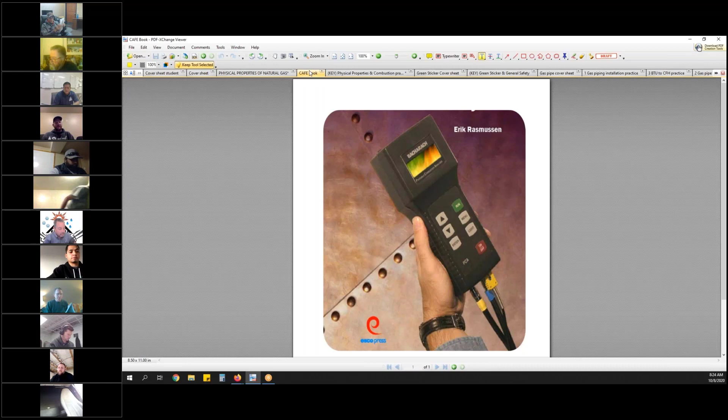All right, so our next one was chapter 2, page 24, which is the chapter 2 review questions. Kurt Daly, did you answer the questions? I did, whether I got it right or wrong. Okay, well why don't you go ahead then and take the chapter 2 review questions.

Start at number 1, you don't have to read the question, just go slow so everyone can keep up, but just tell us what you got and where you found it, and if you got it right or wrong I'll let you know.

Okay, I got true for 1. Okay, and where did you find it? It's on page 11, is the answer to that question. What'd you get for number 2? I got true, it's on page 11.

I want you to go to all those pages and find them and highlight those answers, because again this is an open book exam when you go to take it, and the quicker you can find the information, the easier it's going to be. All right, keep going.

What'd you get for 3? False, false. Okay, where did you find that at? It's on page 14, page 17, and page 22.

What'd you get for number 4? False - that is incorrect, the correct answer is true, and that is found on page 14 and page 16 of the book. Okay, what'd you get for number 5?

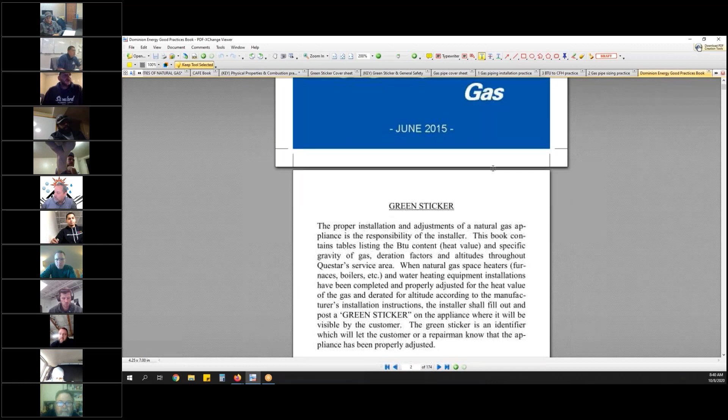Okay, absolutely right. If you have an old book, it's on page 7. If you have a new book, which is the blue colored book, let me pull it up so you can see it. I sent a copy of this to all of you, so it's on page 7 and also on page 11. I would highlight that because you can take it into the test with you.

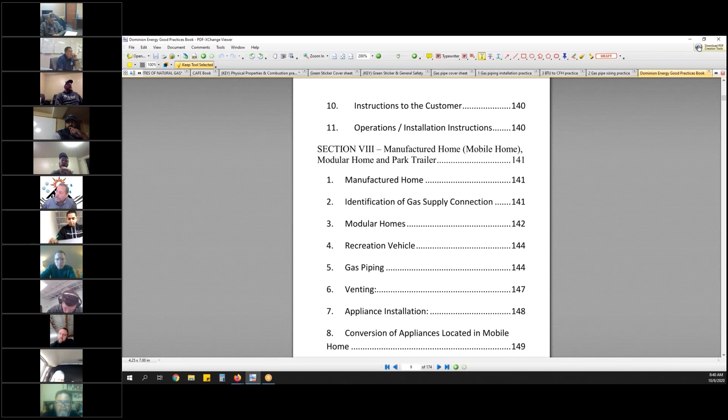So we're going to go back over here to the green sticker cover sheet. We'll continue with you, Carlos, for a few more questions. Number 2, what did you get on that one? It is the responsibility of the installer, and it is on the front page, page 1.

It's like the top, the first thing out of the book. Okay, the responsibility of the installer. So it's right up there in that information.

All right, very good. What'd you get for number 3, Carlos? Refuse gas supply or gas service, and that is on page 11. Okay, page 11 of the new one. If you have an old one, it's on page 7. I sent every one of you a copy of this new one, but if you're working off an old one, the information's on page 7.

Okay, we'll let someone else take over. Let's see, it was... Blake, or no, it was Alan who was raising two hands. Alan, take over on number 4. What did you get? Number 4 is natural gas certification and your identification. And where did you find that in the book? I didn't write that down.

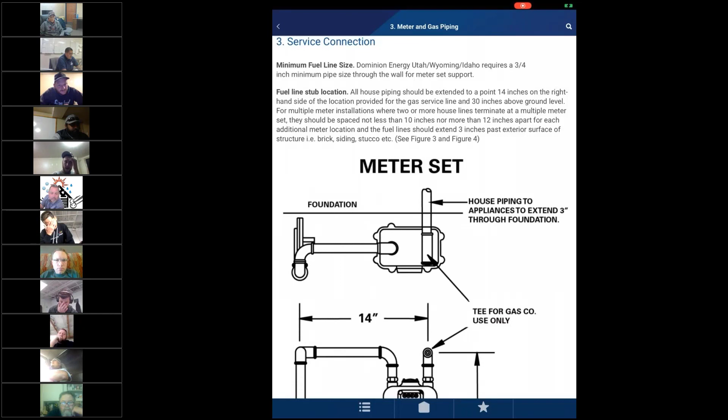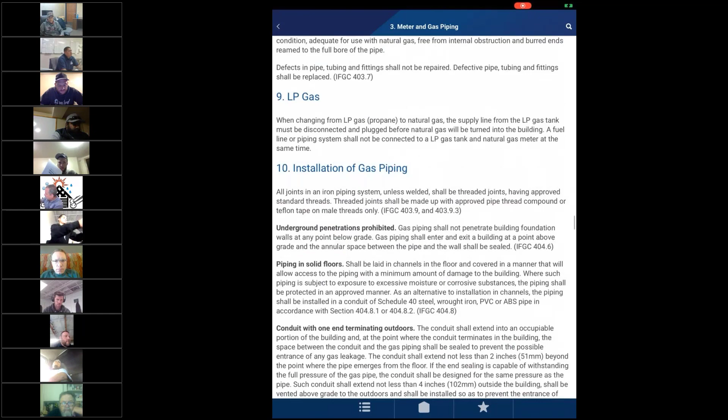Okay, this is the Good Practices app, guys. It's got all kinds of cool stuff in it, but meter and gas piping here. Can you guys see this screen that I'm showing you first of all? Yes. Okay, so you can see the app. So like section 3 that I just clicked on talks all about meters and gas piping and everything. It's basically the book on an app, so you can use it on your phone. It's a really good app, okay?

And what's the app called? It's called the Dominion Energy Good Practices app. You just go to the App Store, and they have it for Android and iPhone and all of that. And the other cool thing about the app is it has some calculators in it. So let's see. Back. So it has calculators, so it will do calculations for you, like we're going to learn how to size gas line. Well, you can use the app, and it makes it really easy to help you size gas line.

I'm going to teach you how to do it the old-fashioned way. The problem when you take the exam is they won't let you take your phone or your iPad and use the app on the exam, which I think is a little bit shitty of them because they don't produce the books anymore. They went to the app, but they won't let you use the app while taking the exam. So that's why you're going to learn how to do it the old-fashioned way.

Okay, everyone can see the screen now with the PDFs on it? Yes, sir. All right, good deal. Okay, so your homework assignment is you're going to complete this. And again, you'll have 2 weeks because I'm taking next Thursday off. And then you're also going to learn how to size gas pipe.

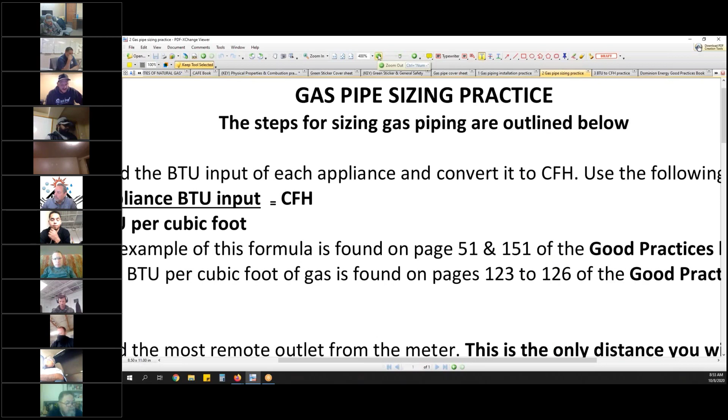So the first step to sizing a gas line system is you find the BTU input of each appliance. Let me make this bigger so that you can all see it good. Whoops, not that big, okay. Can everyone see that okay? Or is that too big? There we go. Okay, everyone can see that okay? Yeah. Okay, good. All right, gas pipe sizing.

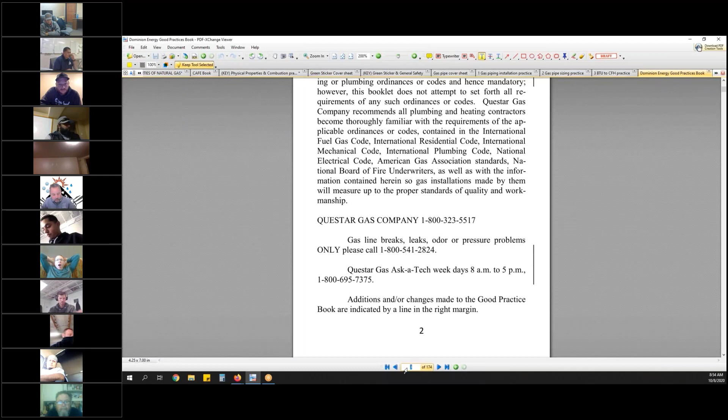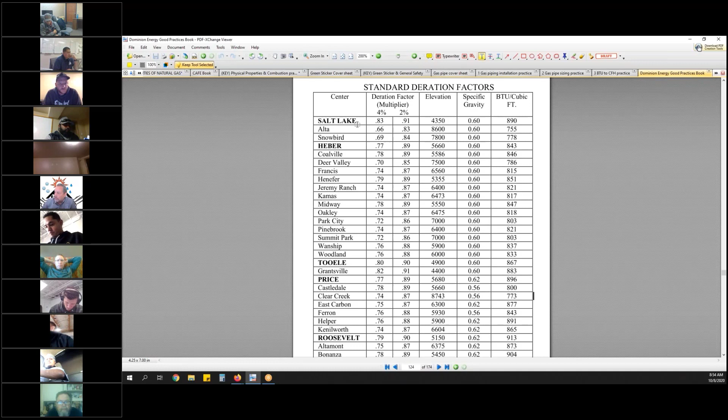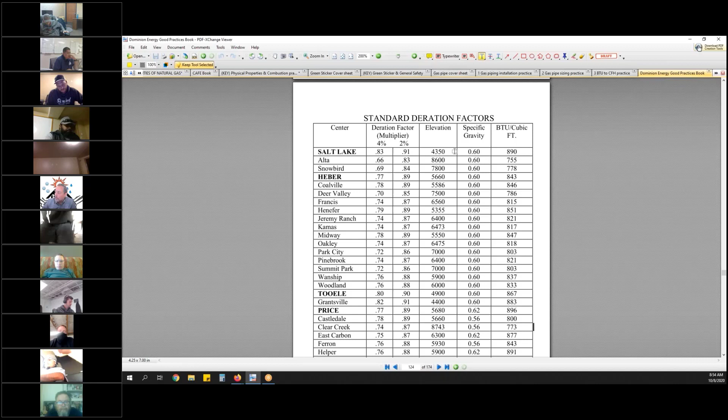When we're sizing gas pipe, the first step is you have to convert BTUs to CFH, cubic feet an hour. And you use the following formula: the appliance input rating divided by the BTUs per cubic foot, okay? So if you go to page 123 and 126 of the Good Practices book, it gives you specific gravity and BTU content and deration multipliers and all kinds of information for everywhere in Utah, okay? So if you need to know what the BTU content is of something or specific gravity of something or the elevation or a deration multiplier, these are the pages where you would find it, okay?

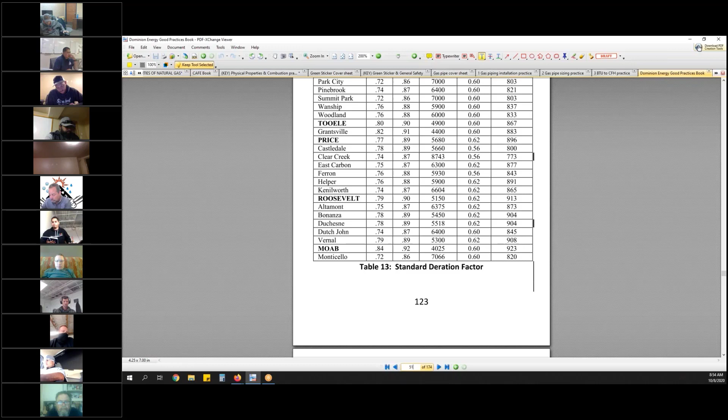And then also, let's see, on page 51, okay, it talks about sizing gas piping, and we always use the longest run sizing method. That's what we're going to learn how to do, and that's the only method you want to do is the longest run sizing method, okay? And it takes you through examples, shows you everything that I'm going to show you up here, okay? So first thing we need to do is find the BTU input of each appliance and convert it to cubic feet using the following formula, okay? Then we find the most remote outlet from the meter. This is the only distance that you will use when sizing gas line.

You'll use tables on 55 and 56 of the Good Practices book. You select your most remote distance. Note, there's a page for a 4-ounce system, which is most every standard residential system. I'll bet every one of you that has natural gas has a 4-ounce system on your house.

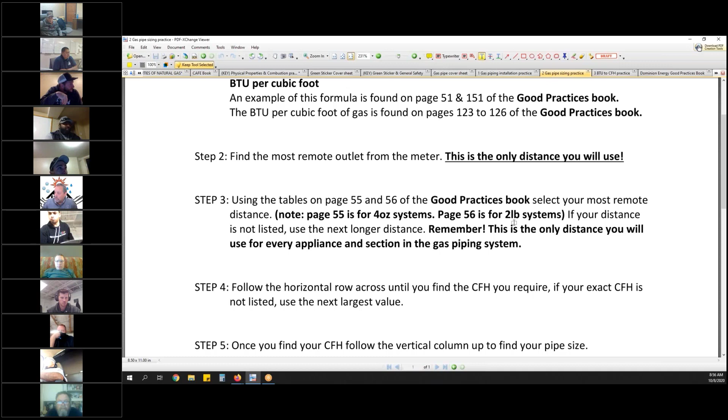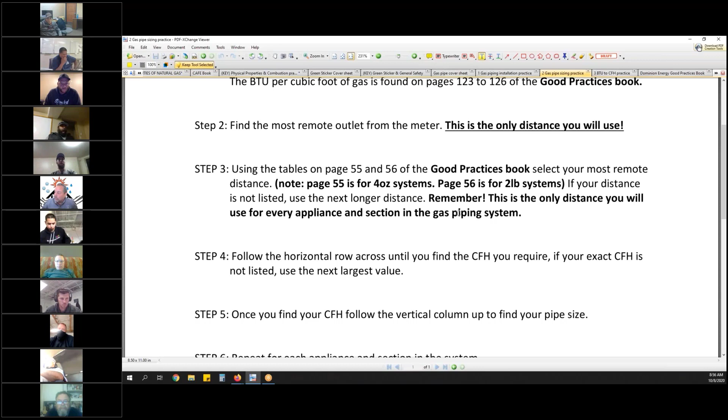There are also what they call high pressure 2-pound systems. I have a 2-pound system on my house because I used a manifold system, and we'll talk about that later. But there are 2 different pressures you need to be aware of, because if you're sizing a system with 4 ounces of pressure, but you're over here on the 2-pound system, you're going to get wrong answers. If your distance is not listed, always use the next longer distance. Remember, this is the only distance you will use for every appliance section in the gas piping system. The mistake I see guys make is they start trying to size individual branches, but you only use one number, the longest run in the system.

Once you get down, they've got this chart in here, and I've just got a snippet of it, but I'll show you the whole chart in the book. Here's an example: let's assume we need 300 CFH, and the most remote distance is 30 feet. First, find the 30-foot length. So I come down the chart to 30 feet, and I need 300 CFH, so I go across. 95 won't cut it, right? 199, 374 — 300's not listed, so always go to the next larger one. Everyone with me so far?

Once you find the CFH you need, you simply go up to your pipe size. So in this case, I need 300 CFH, and I've got to go 30 feet — I'm going to need a 1-inch pipe to get there. You guys with me so far?

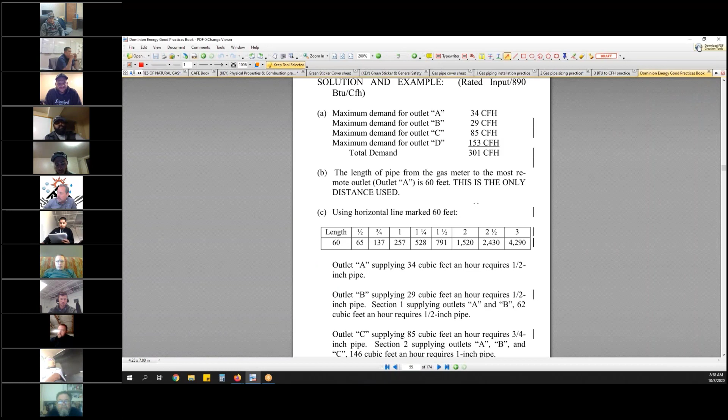We're gonna do an example of that. But that's how you size a gas line, and it's over here in the book. Here's that chart I was just showing you with all the lengths. These numbers are all BTUs converted to CFH, and once you find the number you need, you go up and get your pipe size. So let's go back over here. Makes sense? Everyone good with that?

Any questions about that before we actually pull up a gas line schematic and I size one with you? I've got like 8 more that I'm gonna have you guys work on as part of your homework. But is there any questions to this point? No, I'm not seeing any hands raised or anyone talking. Okay, so I'm assuming you're all on board with me.

Jordan, you're confused? What are you confused about? He's always confused, don't worry about him.

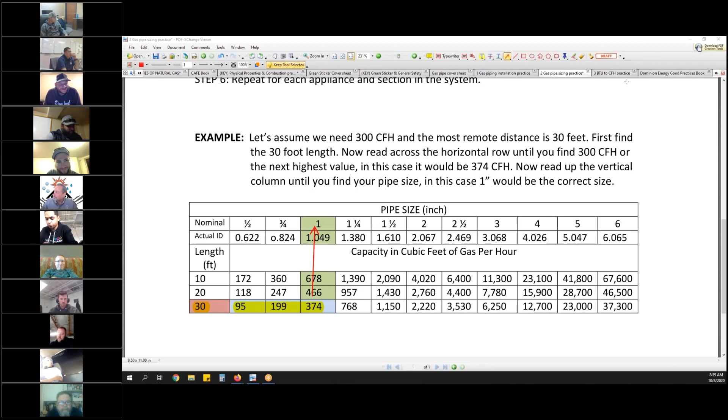Okay, so the first step, step number 1, is convert BTU to CFH. That is the first step. So I've given you a handout where, guess what you got to do — you're going to take every one of these BTU inputs and convert them to CFH. So that is your homework.

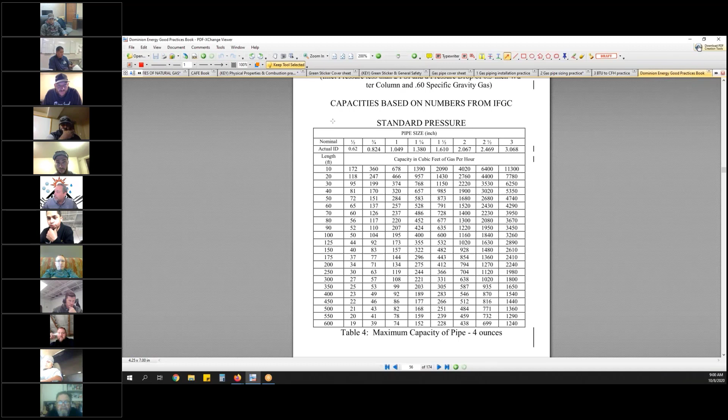Remember, you're going to have this little practice exam with 35 questions. The only way you're going to be able to answer those is to use the book or the app. So that's homework number 1. Homework number 2 is convert all these BTUs to CFH, because that is step number 1, the first thing you got to do. And that's where I see guys make their mistake, because they forget they got to convert BTU to CFH, or cubic foot per hour. And there's all the information you need to do it.

And again, this is an open book exam. Okay, so now let me go see where I put it. I'm going to pull up, give me one second, get rid of some stuff here. I'm going to pull up a gas line schematic — I sent you guys a bunch of attachments, and a bunch of them were gas line schematics.

While I'm pulling this up, did everybody get their attachments and their gas line schematics? Okay, I see everyone shaking their head yes. If anyone didn't, what was that?

Okay, all right. So the first one we're going to do is this one.

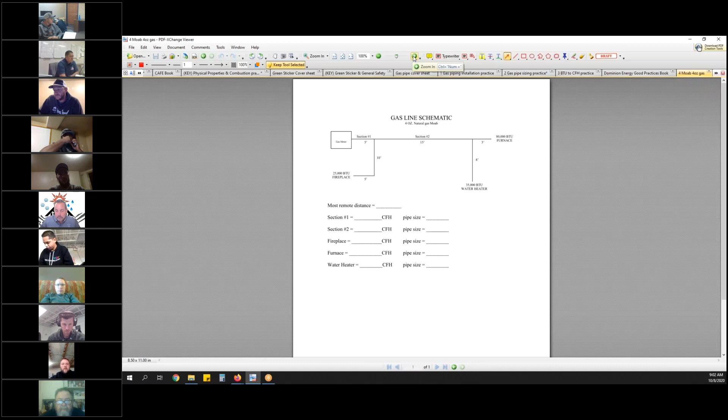Everyone see that schematic on my screen? Do I need to make it bigger? You should all have a copy of it. Let me find it though. Okay, I emailed you all a copy of it. I'll make it a little bit bigger. I'm going to do this one with you, and then the rest of them that I sent to you, that's going to be your homework.

Does everyone have this schematic in front of them? If you don't, you need to let me know. Who does not have this? Looks like we're all good.

When you take the actual exam, they're going to show you schematics like this, and they're going to ask you to size it. It's going to look exactly like this. First thing you need to know is what pressure you're working with and where you're doing it. So we are working with a 4-ounce system, natural gas in Moab. That's important information we need to know.

So we're going to start off with - Carlos, can you tell us the answer to this question? What is the most remote distance on this gas line schematic? 28? What's that? 28, okay.

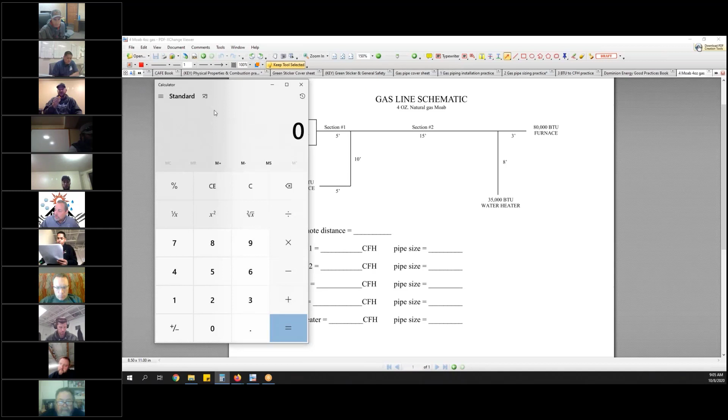Okay, so if I add up all those BTUs - let me move this over here - I've got 25,000 BTU fireplace, plus a 35,000 BTU water heater, plus an 80,000 BTU furnace. So section 1 has got to be able to service 140,000 BTUs, but I've got to convert that to CFH, correct? What is the formula? How do I do that?

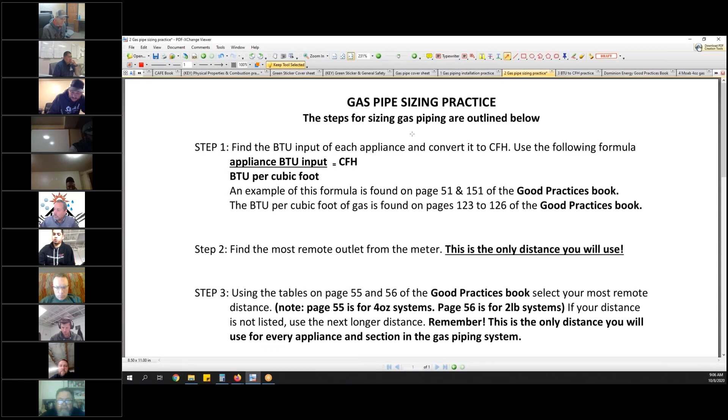So we'll go back over here. The formula can be found on page 51, but it's the appliance BTU input divided by BTUs per cubic foot. Okay, so I'm going to go back over to my schematic.

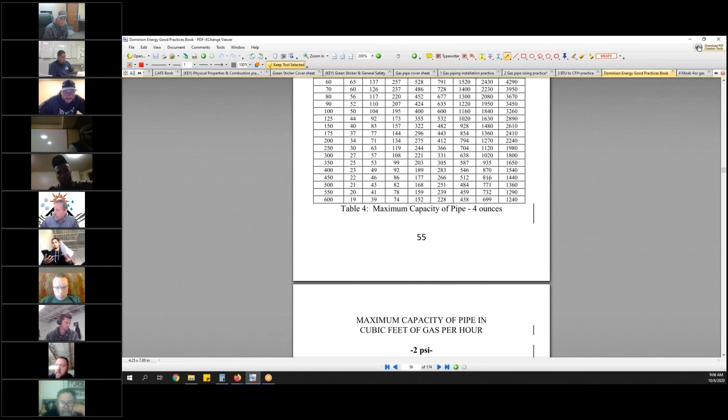Okay, so I know I've got the 140,000 BTUs that we came up with, but I've got to convert that to CFH. Now I'm in Moab, so I'm going to go over to the good practices book, and I've got to find the BTU content in Moab.

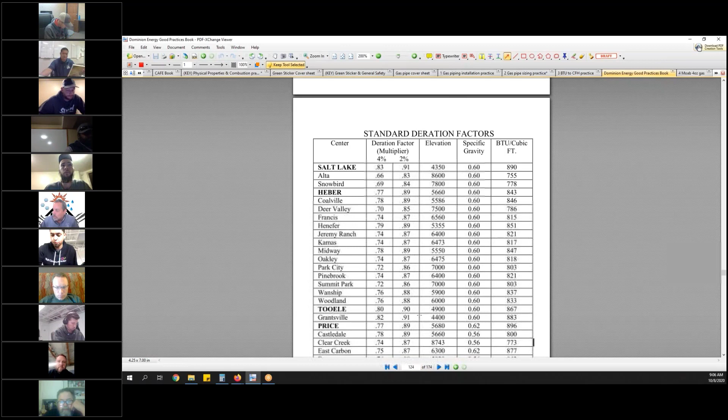Okay, so I go in here and I got to find Moab, right? Hey, there's Moab right there. What is the BTU content for Moab? 923, all right, very good.

So according to our book, we take our appliance BTU input divided by the BTU input per cubic foot. Because we're working in Moab, we know we need to divide our 140,000 BTUs by 923, correct? Everyone with me so far?

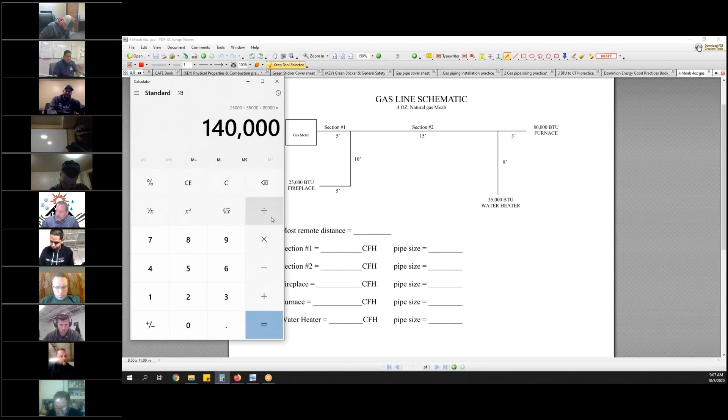Go back to our schematic. So 140,000 total BTUs, but we got to convert it to CFH. I divide that by, again, 923.

Divided by 923 equals 151.67 CFH. Okay, so that first branch has to be able to carry 106 or 151.67 CFH. Is everyone with me so far?

If anyone is confused or doesn't understand, raise your hand. The table's on your app. Yep, if you have the app, this thing is super easy, it'll do it for you on the app. Unfortunately, you cannot take the app into the test with you.

So you've got to know how to do it old school. I just want to know where the tables are so I can look up your thing, 'cause I don't have an old book. Oh, so if you go into the app, right at the beginning, down at the bottom, there's kind of 4 little elongated dots. Click on that, and it should have a listing that says tables. Find it? Yep, okay, so that will have all these tables in it.

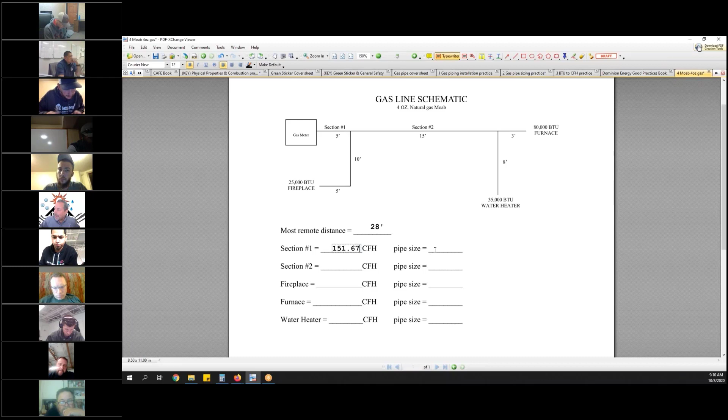So to find the pipe size for that, I go over to my good practices book, or if you have the app, it'll do it for you. Okay, go to my good practices app, and I use 28 feet.

That's all I care. Oh, but wait, 28 feet isn't listed, right? So what number do I use if my number's not listed? The number above, the highest. Go up to the next highest number.

Okay, so I'm going to go to 30 feet, and I'm going to go across until I find 151 CFH. Well, that won't cut it, that's only 95. And 150 isn't listed, so I go to the next highest one, 199. And then I simply go up this chart, and it tells me that I need 3/4 inch pipe.

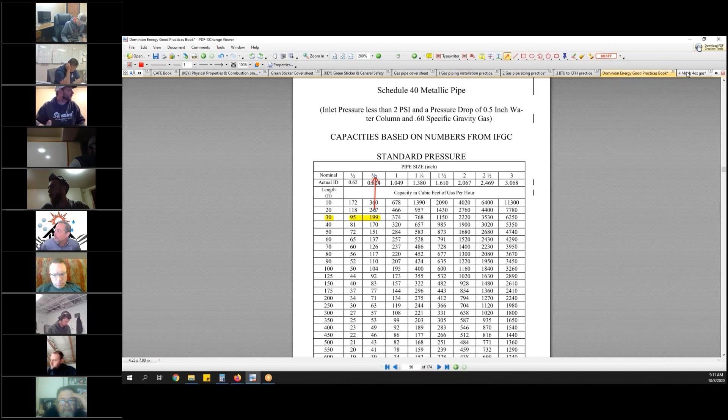So I come back over here, and I plug in pipe size, 3/4 inch. Whoops, that's 3/4 feet, 3/4 inch. Okay, everyone with me so far? Any questions? Anyone totally confused or freaking out?

Okay, I'm going to let one of you size section 2 for us. So let's see, Robbie, go ahead and turn yourself on so you can talk to us and the rest of the group. Yeah, you would pick on me, wouldn't you?

Of course. You guys all know Robbie is an insulator. You've never worked on furnaces, right, Robbie? No, this is why he's kind of scaring the crap out of me here. Okay, don't worry, you're going to get through this. 'Cause if you just do what I'm showing you, you will pass this test. I promise you.

Okay, I want you to size section number 2 for us. So section number 2 is this section right here. Okay, so let's start with, we already know our most remote distance. What appliances is section number 2 servicing for us, Robbie? Looks like going toward the furnace.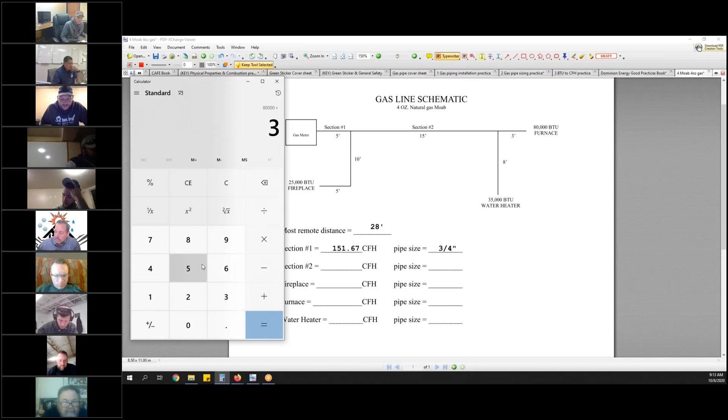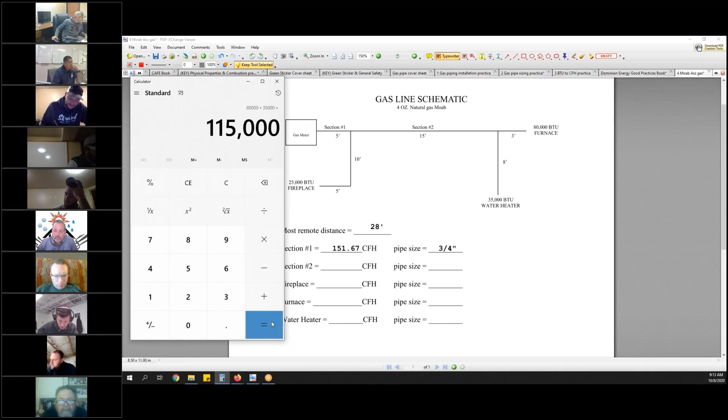80,000 plus 35,000. Whoops. Dork. Is 115,000. Now what do I got to do next, Robbie?

So we got to convert that to CFH. Okay, and what is the number I'm going to use because I'm in Moab? Help me here. Okay, so I'm going to go over to my good practices book or the app.

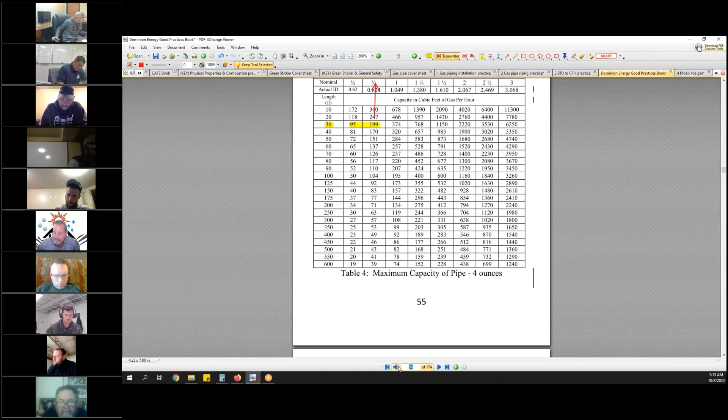Which one are you using, the book or the app? I'm just watching the screen here, I don't have either. Oh, okay, well I emailed you this book in the first email I sent out.

Okay, so right here, Moab. So, well, 923, right? 923. Okay, that's the BTUs per cubic foot. Yeah, okay, there you go. Okay, so now let's go back to the schematic and our calculator.

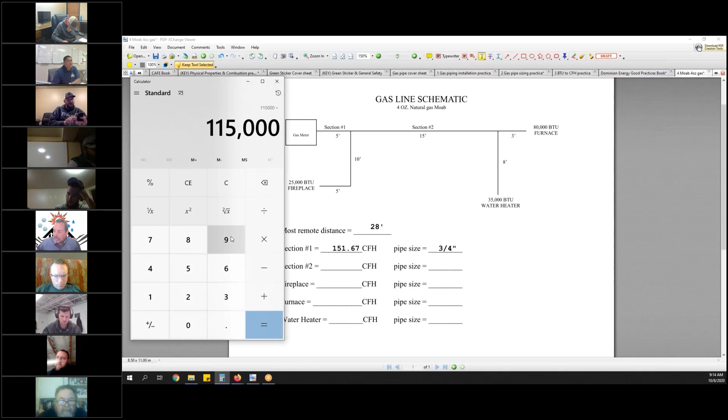Okay, so 115 divided by 923. 124.59. Okay, absolutely. So I'm going to go ahead and write that in here in this box, 124.59. Okay, now Robbie, what size pipe do I need for that branch or that section?

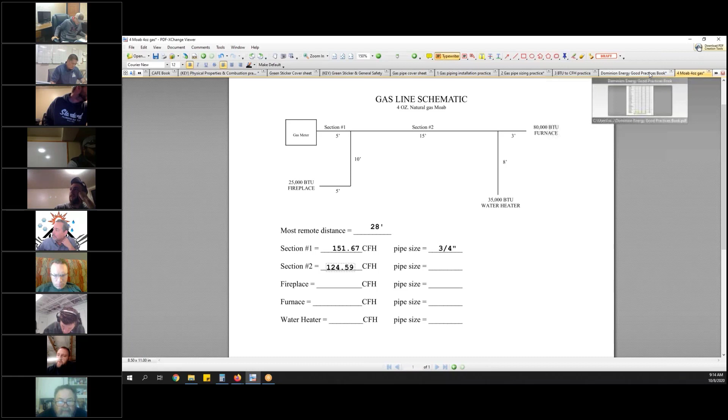How am I going to figure that out? Got to go back to the thing, got to go back to this damn book, right? Or the app. Yeah, the app will do all this for you, but you can't take the app into the test. Yeah, that's what you said. Yeah, all right, let me get rid of these ones.

All right, so again, we only work with one distance, 28 feet, okay? So we're staying on that same one. We go across until we find something that will give us... okay, half-inch won't do it, right? So it looks like we got to go to 3/4. We read up the line again. 3/4. Come back over here and put our pipe size in. 3/4.

Okay, Robbie, who's never worked on a furnace but is the best damn insulator in the program, you just sized your first gas line. How hard is it? Not too bad. As long as you follow the instructions and follow the book, it's pretty easy, right?

Yep, follow the book. Follow the book, read the instructions. That's my mantra, right. Read the instructions, follow the book. There you go. Perfect. Mr. Brandon Nez, can you hear me okay? Are you going to start crying?

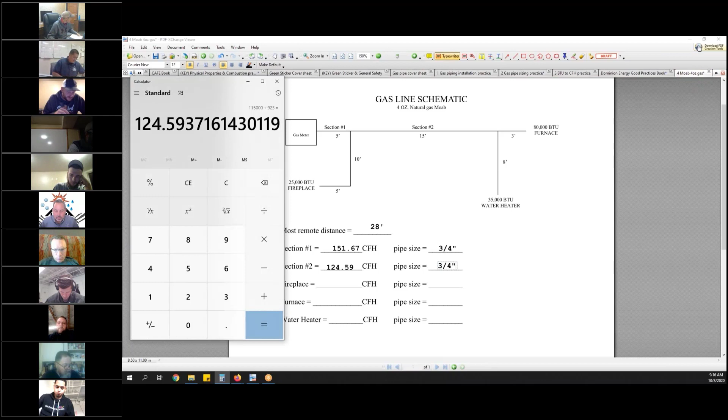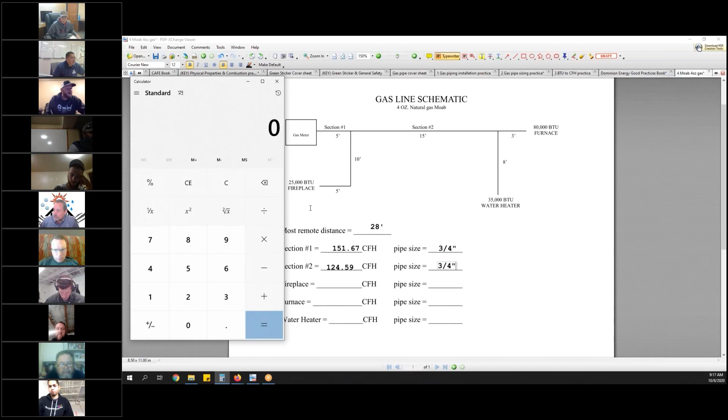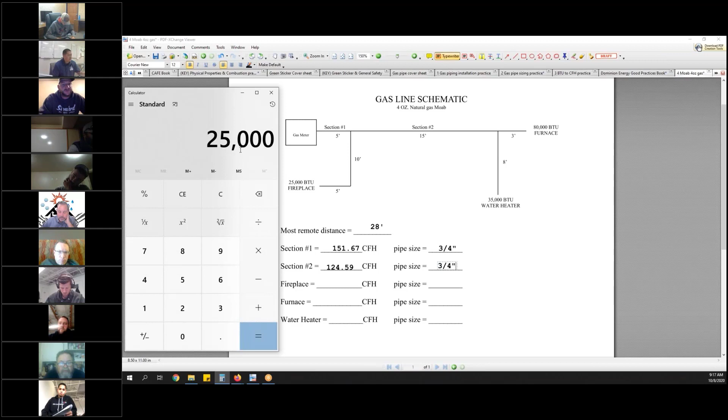Okay, so we take 25,000 because that's what our fireplace is. Okay, let me move my calculator out of the way a little bit. There we go. Okay, because now they're asking you this line feeding the fireplace has got to be what size? So it's 25,000. So how do I convert that to CFH, Brandon? Go to the chart. Okay, so I go to the chart. It's on page 123.

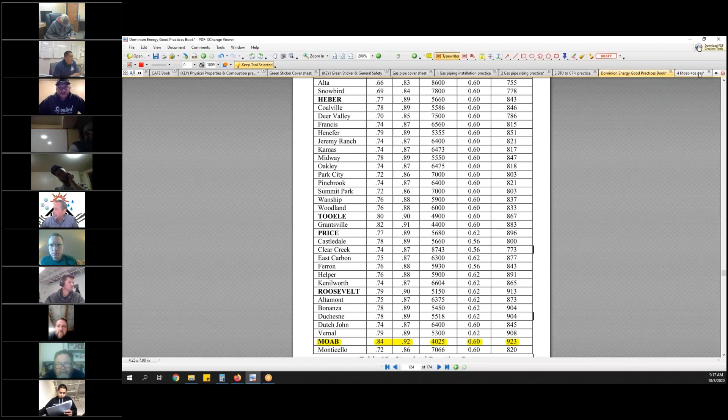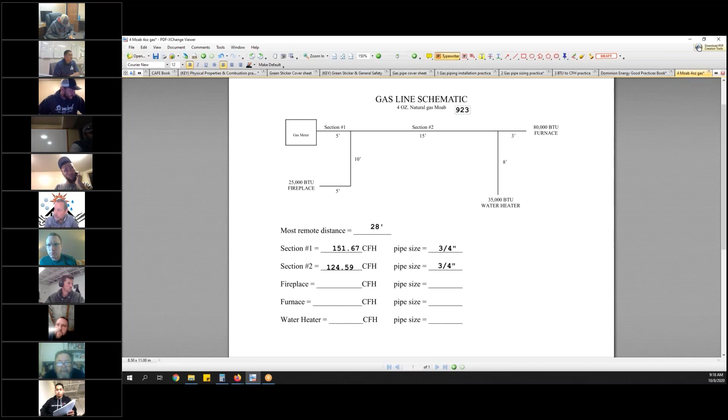I'm trying to upload my good practices book. My computer's not cooperating with me. Ah, okay. Well, remember, we're in Moab, we're 923. What you could do to make life easy for you, once you know what number you're working with, is just put up here 923 - that's my number I'm going to divide every one of them by. So I take 25,000 divided by 923 equals. Okay, so what do I need in there? 27.08 CFH.

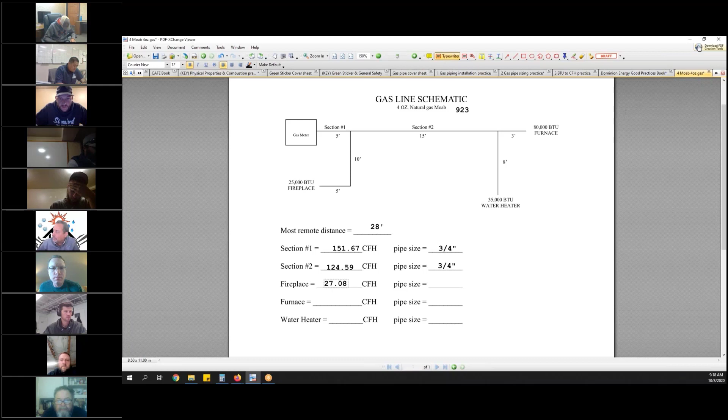Okay, how am I going to figure out what size pipe I need to feed that? Where am I going to go to get that information? To the other chart, the sizing chart. Uh-huh.

Okay, so we're going to delete that. Remember, we only use one length, the most remote length. In this case, it was 28. There is no 28, so we use 30. Okay, and I need 27 CFH, right? Hey, it looks like that line needs to be a 1/2 inch line, correct? Let's go back to our schematic. Yes, sir. Okay, see, this isn't too hard, is it, guys?

Brandon, how many furnaces have you worked on, or how many gas lines have you sized in your lifetime? What's a furnace? There you go. Okay, all right, so now we got to do the furnace.

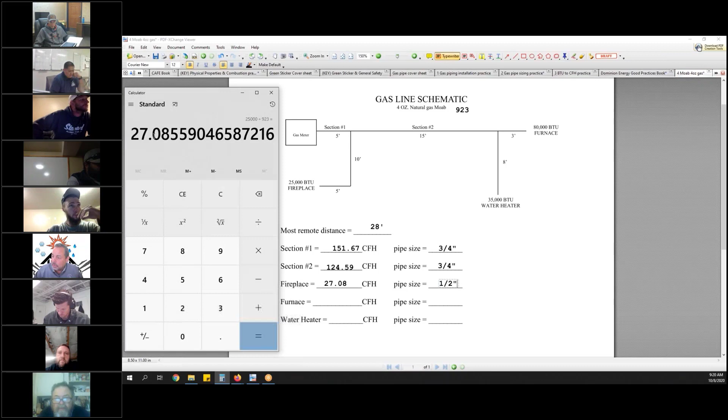So let's see, let's have Tren. How about you? Good. Okay, so we're going to take 80,000 BTUs and divide it by 923. Okay, gives us the 86.67.

Okay, and then we're going to go over to our chart and go down to 30 because there's not a 28. And so 95 would work, and it's going to be 1/2 inch. All right, very good, perfect.

How many furnaces have you ever worked on, or sized gas lines roughly in your career? Furnace is about 5. About 5. Okay, so you're a newbie. Whoops. Yes. But this isn't too tough, is it? No. Okay, all right, good deal.

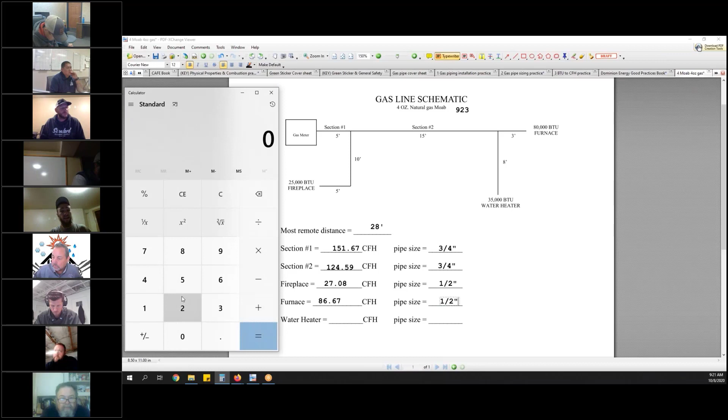Okay, all right, we got one more left, the water heater. Mr. Kurt Daly, you size that water heater up for us? Take us through the process. What's that? We'll try. So okay, we got 35,000 BTU. Okay, right. Divided by 923. You get 37.91. Okay, so we need 37.91.

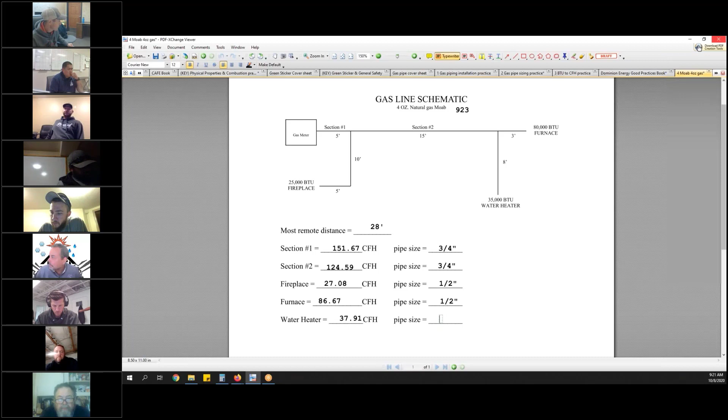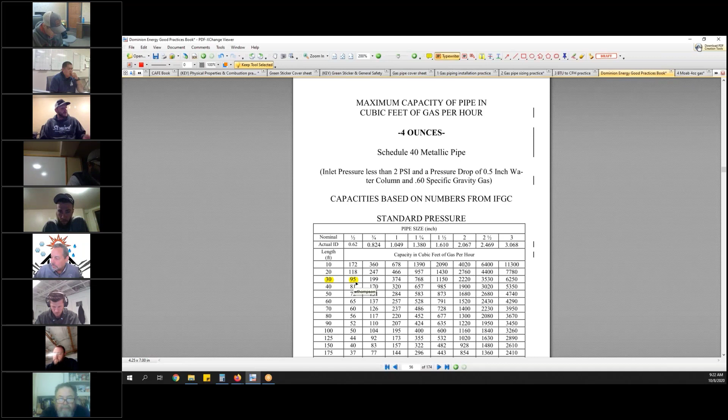And how do we figure out what size pipe we need for that? You go to your graph and you get 28 feet of pipe, so you've got to use your 30 mark. Then 95 will work, so you go to 1/2 inch pipe. Okay, very good. You guys just sized your first gas line system.

I sent all these handouts to you in the email. We did the first one together. Let's see, let me make sure... okay, you should have 3 more handouts that you need to size as part of your homework.

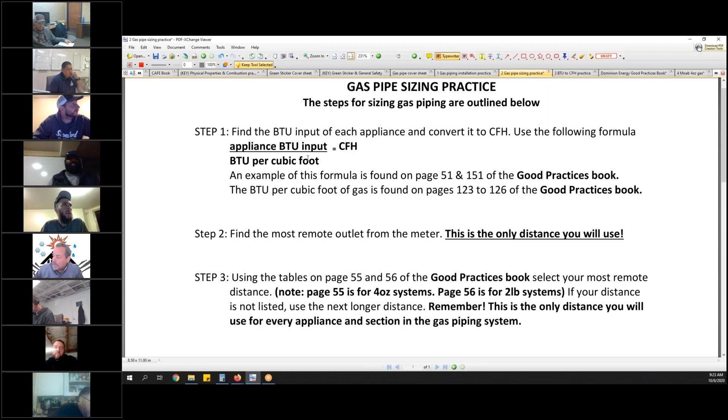Figure them out, they're all in different cities. One of them is using a different pressure, so remember you've got to make sure you convert to CFH and use the right pressure. There are 4-ounce systems and 2-pound systems. When they give you the schematics on test day, this is exactly what they're going to look like. They'll have a pressure, tell you where it's located, and then ask you questions just like we did here that you've got to figure out.

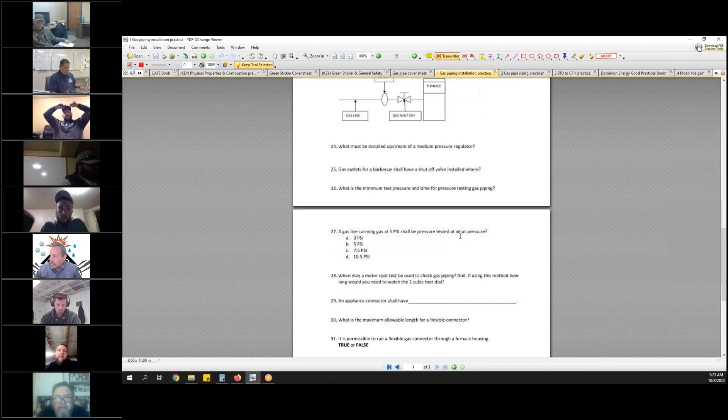So just to reiterate, your homework is to finish the rest of the schematics, go through this process of converting BTUs to CFH, and put all the answers in. Answer all these questions using the good practices book, and all of those should go behind the cover sheet in your folder that says gas pipe installation and sizing.

Okay, any questions, comments, concerns, confusion, anything before we end this session? Wade, yes, is there a reason you're writing everything out to the hundredth

instead of just saying 37 CFH? Yeah, you can just go CFH: 37, 86, 27, 124, 151. It's a habit I have. So yeah, you can just go, you don't have to go out to all the decimal points. It's a bad math habit I've acquired, because some stuff you do you've got to go down to the hundredths. But for this, if you just go with 151, 124, 27, 86, 37, you'll still get the right answers, okay?

I had a class where someone didn't understand rounding, and I said this could be 152, and they're like, what is rounding? You guys all understand rounding, right? I don't have to explain rounding to you. Okay, all right.

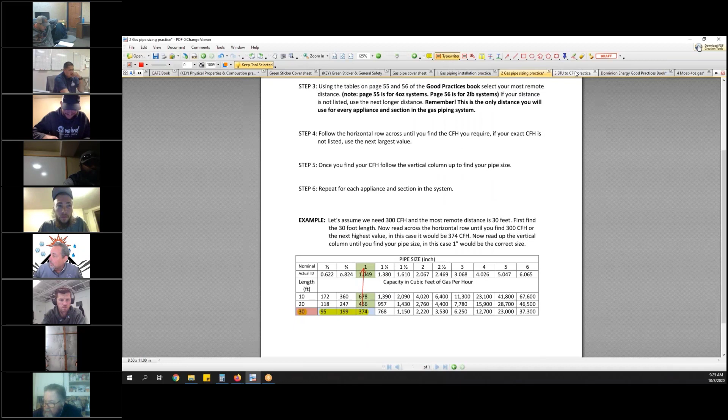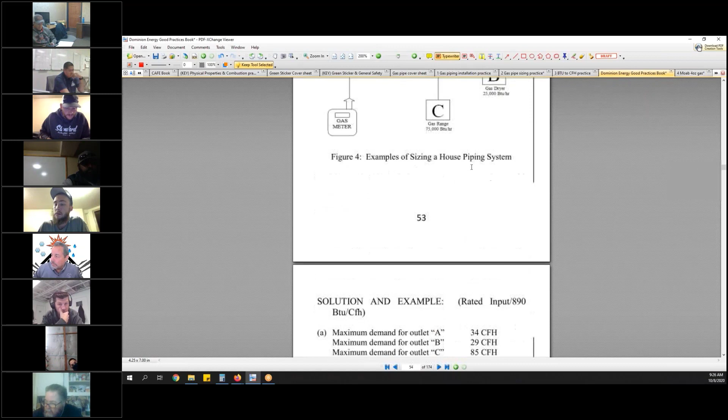I sent you all everything you need to do it, so you should have your cover sheet, this practice exam that you need to answer and tell me where you found the answers, all the information on how to size gas lines, and an example practice on converting BTUs to CFH. I emailed you the very first email, everyone, I emailed this book out to you. So if you don't have it or lost the email, if you need it, email me or call me so I can get you another copy.

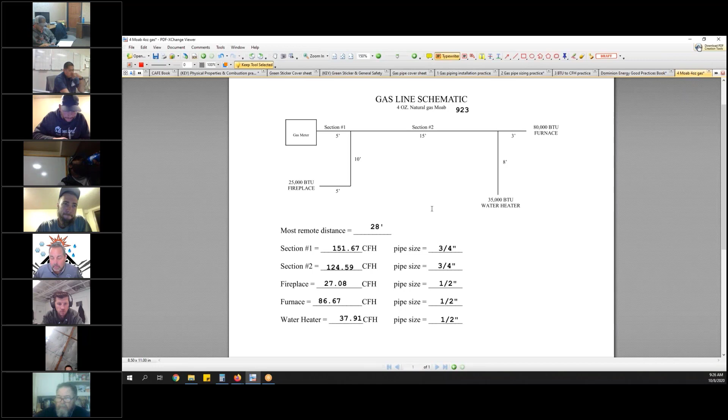And then you're going to have a few more of these schematics that you've got to size. So you've got 2 weeks to get this all done. So let me get my calendar up here and let's decide when we're going to meet again.

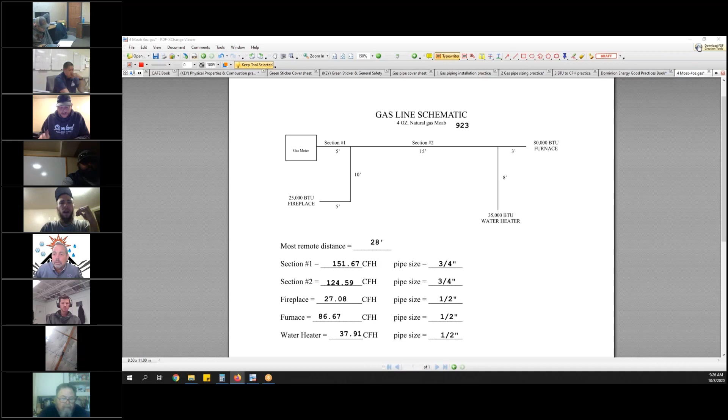Hold on, are you doing this because of the deer hunt? I'm just asking, asking for a friend. Am I taking off because of the deer hunt? Yes, I'm going to be up in Idaho doing a little thing up there. In fact, you guys from Logan, when this meeting is over, why don't you hang out on the line with me for a little bit?